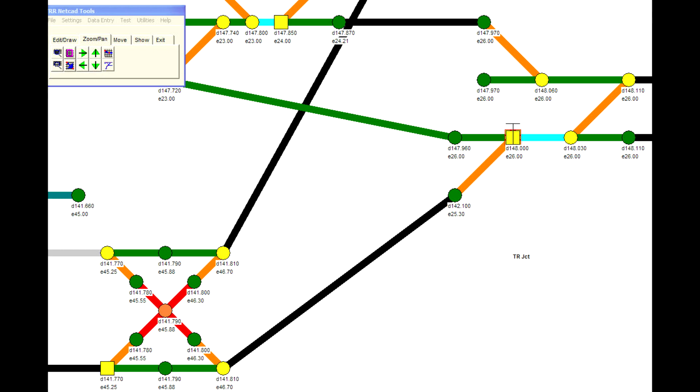Simulation is an essential part of any capacity or service planning project. Although simulation is essential to these efforts, the meaning and application of simulation is generally misunderstood. In general, simulation means imitation or enactment.

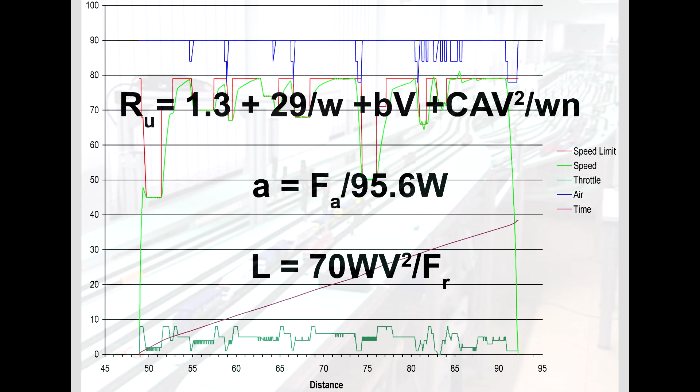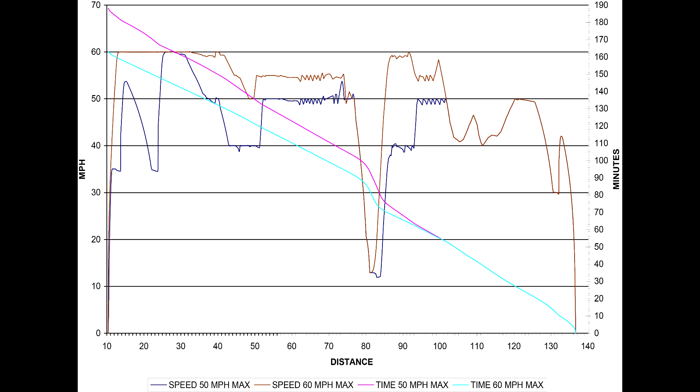Railroad operation simulation is typically a mathematical model, although model railroads have been used for the purpose. A mathematical model does not require a computer, although a complex simulation is certainly made practical by a computer. The essential elements of rail infrastructure and operations planning are time and distance. The mathematical model projects the distance a train will travel over time. The distance is used to determine the infrastructure configuration at that point.

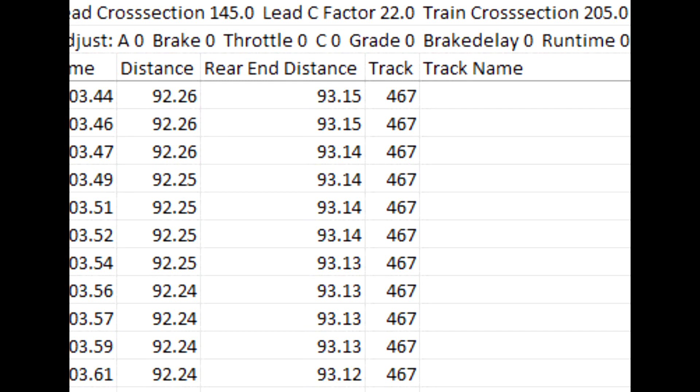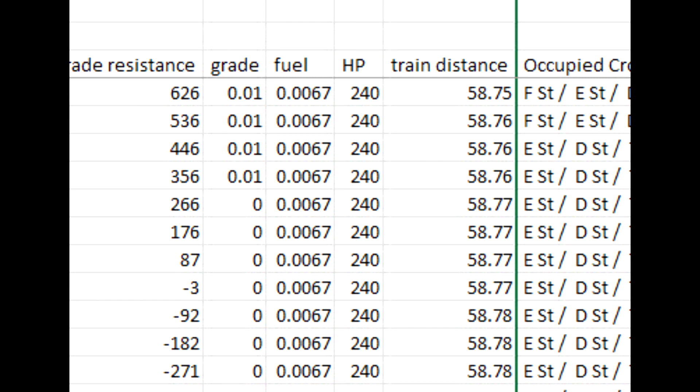The simulation may involve only one train, in which case the purpose of the work is to determine the performance, such as speed, energy consumption, emissions, or other factors of the train, or particularly the locomotive. The simulation may involve several trains, in which case the purpose of the work is to determine the relation of the trains to each other and to the infrastructure over time.

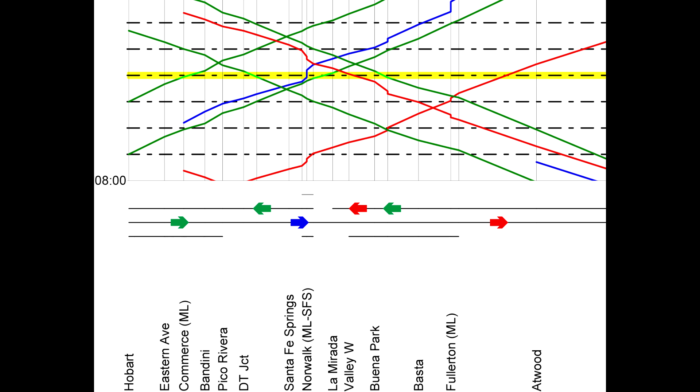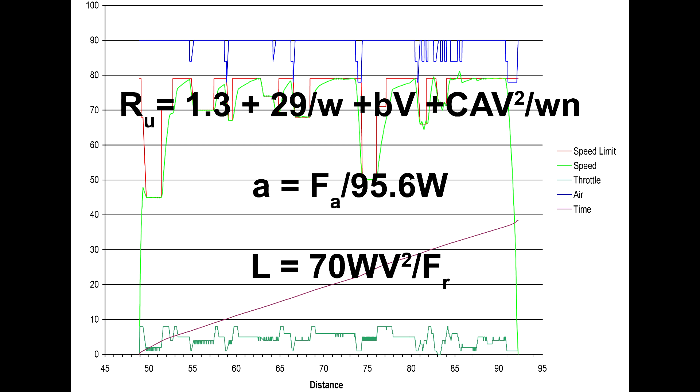In the former case, the train speed is repeatedly calculated using a formula which uses the sum of all propulsive forces, such as the locomotive, gravity, and momentum, and all resistive forces, such as braking, friction, air, and gravity. This is a labor-intensive procedure that is most conveniently done with a computer program. Typically, the calculation is conducted at 1-second intervals in the model time. In real time, there are many of those calculations performed per second.

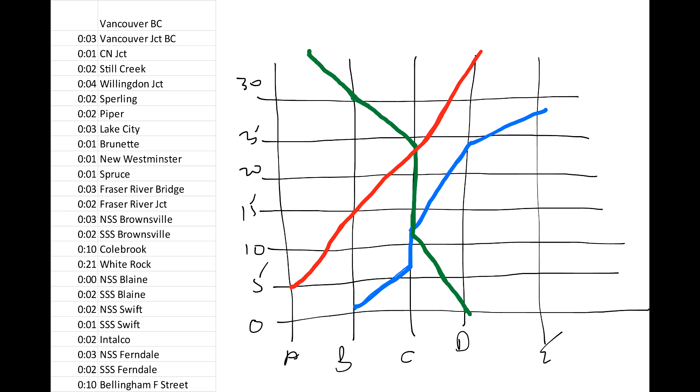In the latter case, the running time between stations may be the result of observation or the result of calculation. However, the train simulation may be conducted manually using the computer-calculated times. The running times can be incorporated from a spreadsheet calculation of the movement of a train, which can be plotted as a time-distance graph manually or by the spreadsheet program. After the string line diagram has been developed, the relationship of the trains to the infrastructure and to each other can be examined. If the purpose of the work is crew management, equipment management, or an approximation of a timetable, the simple time-distance level of detail is sufficient.

If the purpose of the work involves scheduling over a route that has infrastructure constraint on the free movement of trains or examination of the adequacy of the infrastructure for the traffic, the distance calculation must represent the specific track elements occupied by the train, rather than just the distance the train has traveled. This level of detail is beyond that easily drawn on a string line diagram by hand.

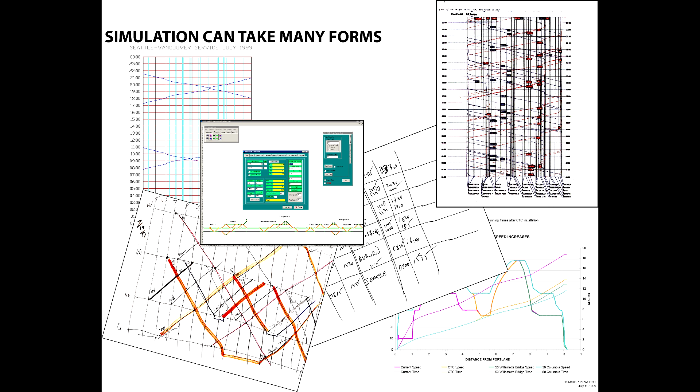Simulation in the rail infrastructure and operations planning context generally means rail operations simulation computer software. Simulation software is typically complex and comprehensive. Trains, infrastructure, and some rules of train movement are the input data. A traffic or string line diagram and an array of statistical data are the typical outputs. The need for complexity of simulation software is determined by the complexity of the research and the accuracy required of the output. Although simulation software is a commonplace part of railroad infrastructure design and service planning, the capabilities and uses of simulation are not well understood.

Simulation software and a chainsaw are similar. Both are tools. Neither can perform the intended function by itself. Both facilitate work that can be done another way. Both can produce undesirable results if used improperly. Both can be beneficial under the control of a skilled professional. Both can be dangerous in the hands of someone who is not.

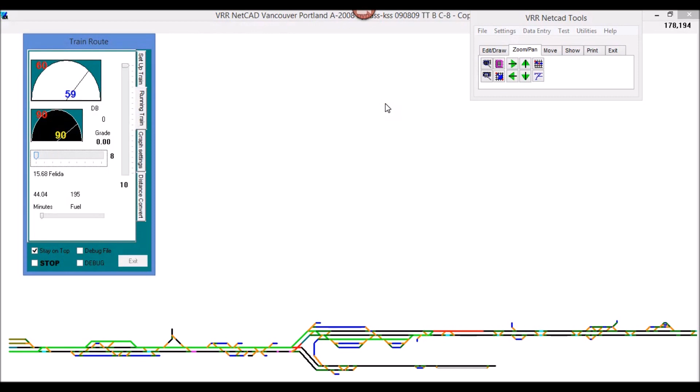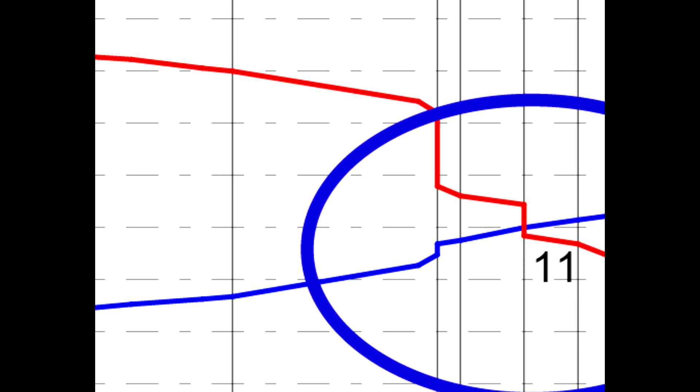Complete simulation software packages combine all of the stages, develop the running times, calculate the locations of the trains over time, including specific track elements occupied by the train, and produce reports about train movement and infrastructure usage. Simulation software packages include a train dispatching model which resolves conflicts, meaning more than one train trying to use the same segment of track simultaneously. Simulation software packages generate a stringline diagram and several reports about what occurred during the simulation.

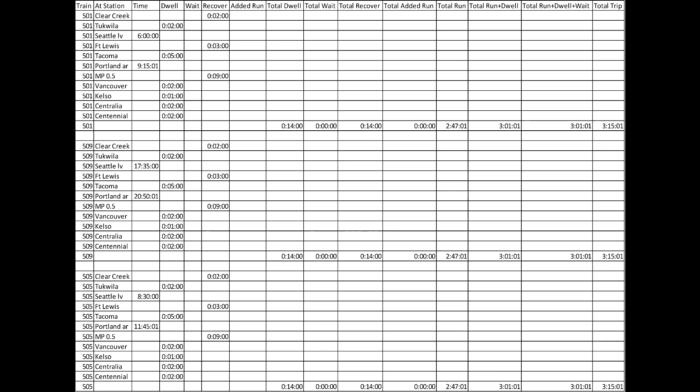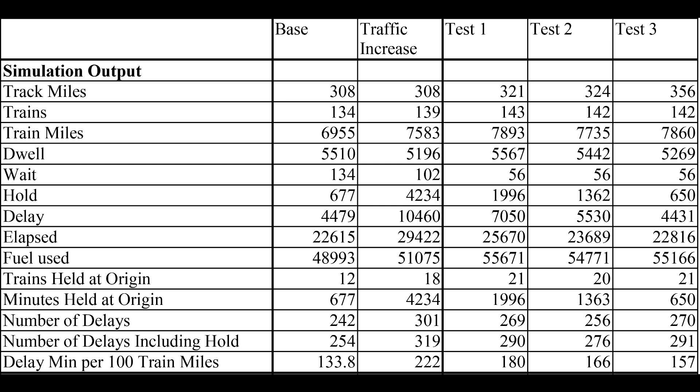Sometimes the reports are quite specific about train interaction and infrastructure use. The reports may, however, be summary reports providing delay statistics such as train delay per 100 miles, fuel statistics such as fuel use throughout the simulation, and the amount of time that trains were moving as opposed to the amount of time that they were not. Simulation software provides a wealth of information. It does not, however, answer questions, such as what can be done to eliminate congestion at this station or what needs to be done to reduce or eliminate delays.

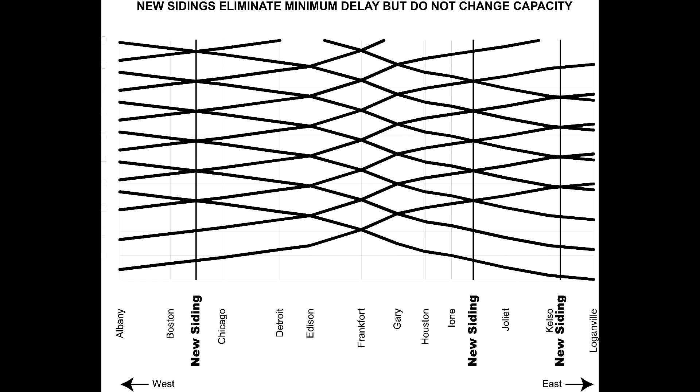When the simulation is used for research into the best infrastructure arrangement or the best service plan, the methodology is heuristic, essentially trial and error. The researcher may try infrastructure arrangements and/or train schedules on a hunch or a guess in an effort to reduce a statistical measurement such as train delay. However, the most productive use of simulation involves developing scenarios using principles of timetabling and capacity, then testing the results with simulation. In North America, simulations generally represent several consecutive days of operation.

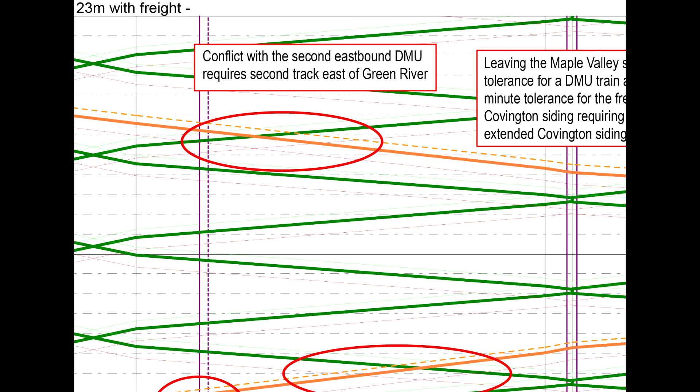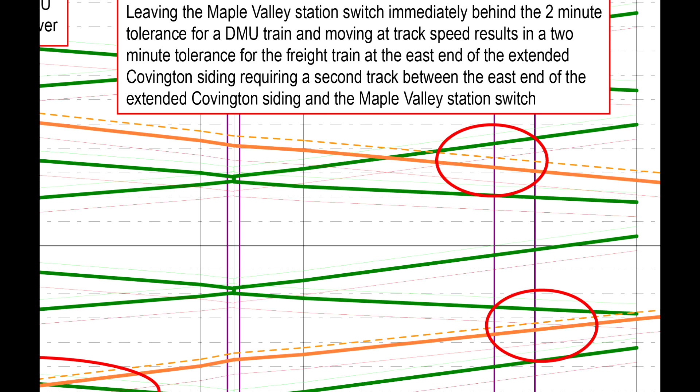Randomized simulations represent the standard random operation of North American railroads. Random operation is inherently flawed. Simulating many days of random operation and analyzing the statistical output for the entire period may be misleading. A more effective procedure is to work with a single day of the heaviest traffic that is anticipated. This method is more effective if random operation is minimized, but developing a solution for a single heavy day is more effective than trying to develop a solution that applies to a period of several days of random operation. Best practice is to examine the stringline output for information that can lead to an exact conclusion. Once that is acceptable, the summary statistics may be useful.